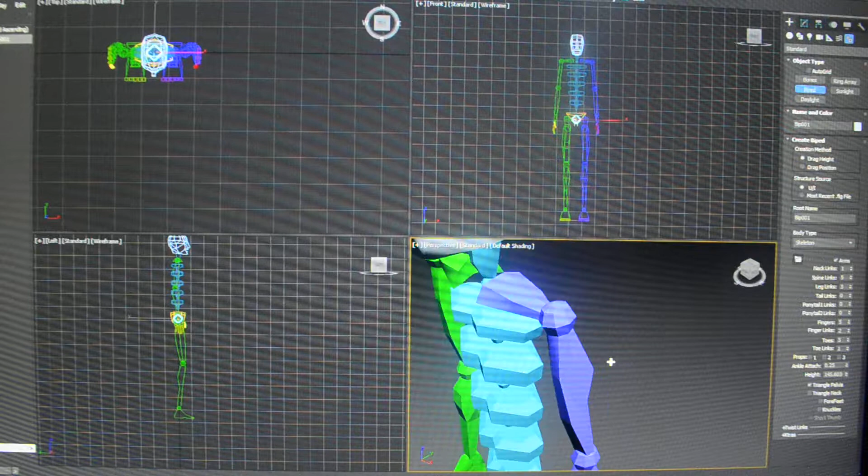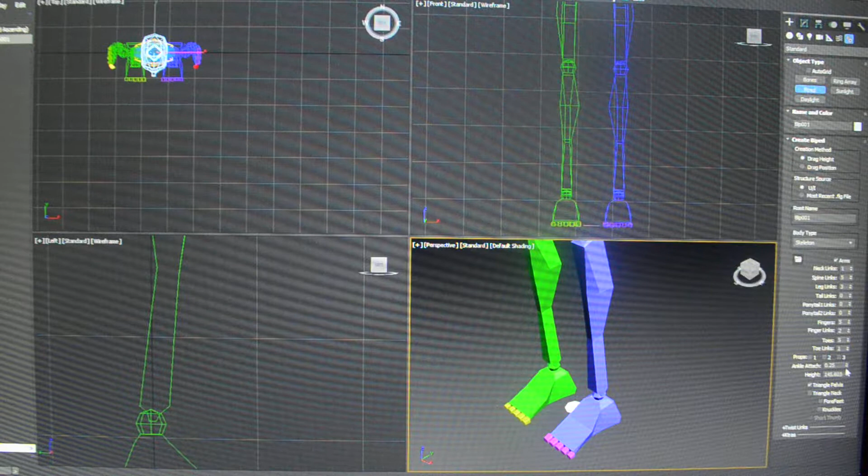After I've created my biped, you want to look at it to make sure it's what you want, because you can now, after you've created it, put the biped in here and make adjustments. So I made adjustments to my ankle attach. See, the ankles weren't right. They were like this at 0. So they need to be, let me double check this in side view.

Maybe 0.23 to be correct. Okay, so just check your biped, because now, you usually don't use 5 toes. Most people just use 1. I'm going to use none for this. Oh, you can't, you have to have 1. And it's because often when we do feet, we just do 1 toe, because they wear shoes, or they're a character that doesn't have a whole lot of movement there with individual toes.

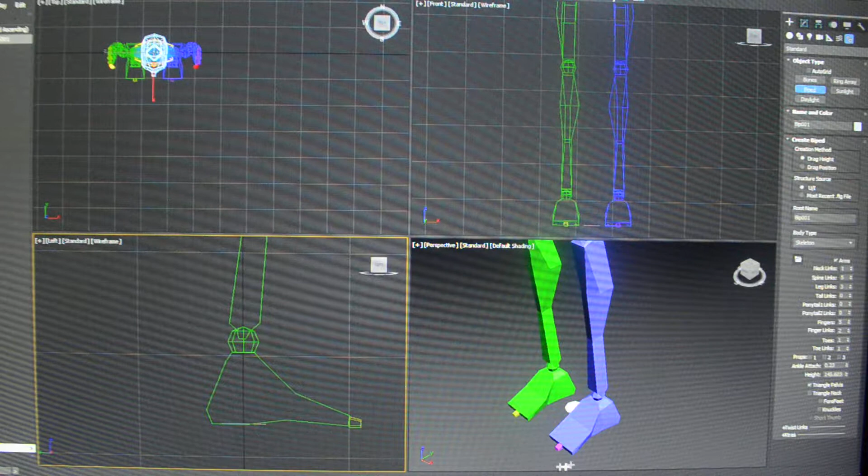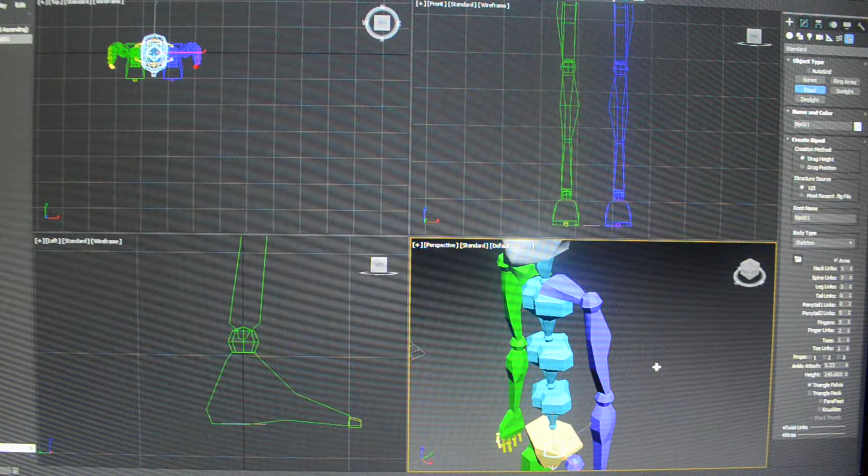Okay, and so you can make those changes now while you have the biped in here. I don't really need that many spine links. He's not going to bend that much. It's going to bend at the waist, bend maybe in the middle and at the shoulder. So spine links 2 could be enough. Let's do 3 just to give him a little more flexibility. Okay, and so that's where I make changes to my character's parts.

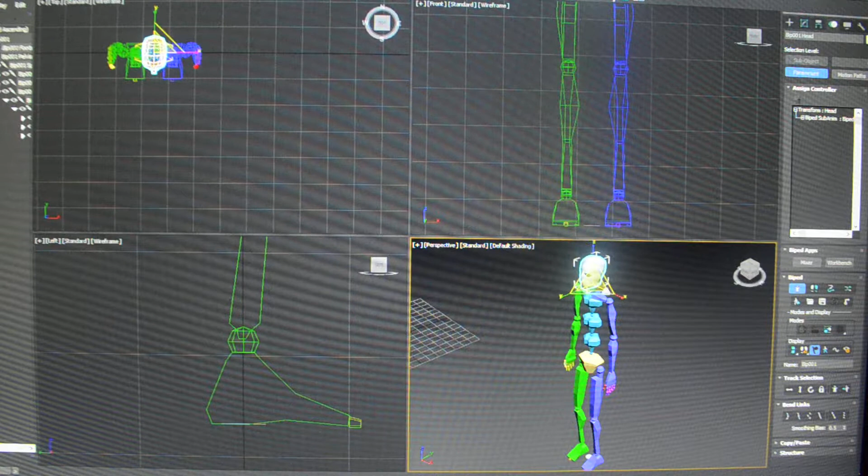If I want to make changes, for instance, I want the head to be larger, right? I'm going to go to my motion tab, parameters, figure mode, and then I can make the head smaller, larger. And any other parts that I want to make adjustments to, I can do that here.

Now, for your skeleton to match your characters, and this is where we get into more about why we use the Vitruvian Man pose, you just go to his upper arm and rotate those out, and now you see he's in that same pose, and he would fit inside my character if I had a character of a human. Most of the time we're not doing literal humans.

This will suffice for humans and humanoid figures. The great thing about starting with the biped is it's fully articulated. However, often you are going to do characters where this won't work. One of the things that needs to happen, once we get into skinning, for the skinned character to animate properly without problems, is that you want your bones to fit inside your character as well as our bones fit inside our bodies. If you again use yourself as an example.

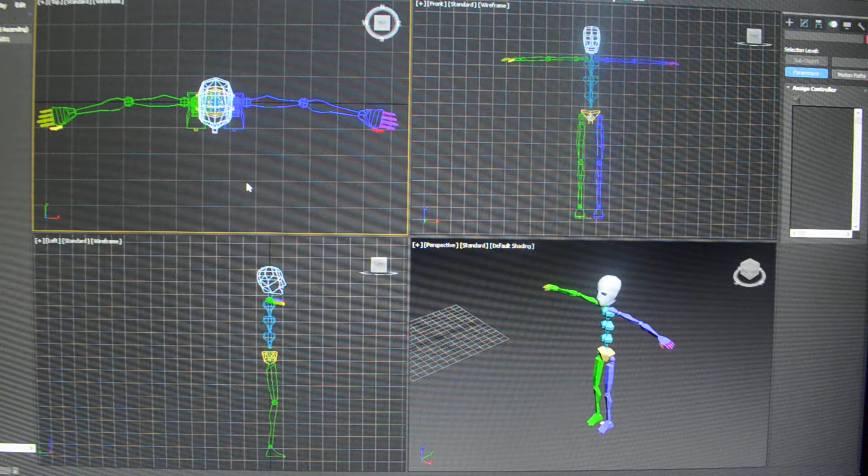And just the way you do that is by bringing in your character and using it as a background for the bones. And we're going to talk about bones too. So those are also under systems, bones. And here they are much more independent. I'm just going to do the default bones, draw default bones. So I'm just going to take the default bone and draw a bone in this view. And they keep going until you right click. And you see now I've just created a chain of bones.

And they are automatically linked. So if I move my hand, it swings the upper arm with it. If I move this arm, it takes the whole arm with it. It's just like we did with our bones. I can move the elbow this way, I can rotate this way. So this is a linked bone chain, and I can move my hand.

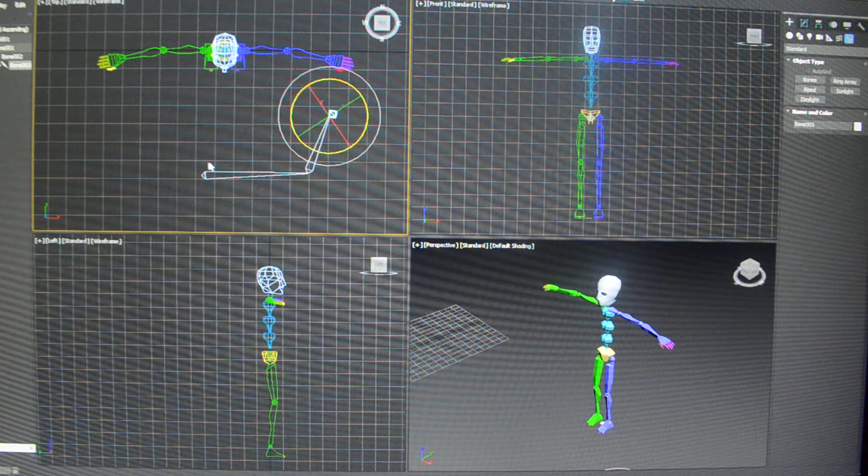And so you could see if I had a skin that fit over this, and I start to move these parts and pieces, and I apply the skin modifier, it will take the character with it. So when you see in animations, when you see characters move, what's actually being moved and manipulated is the rig. And that is why this is called rigging.

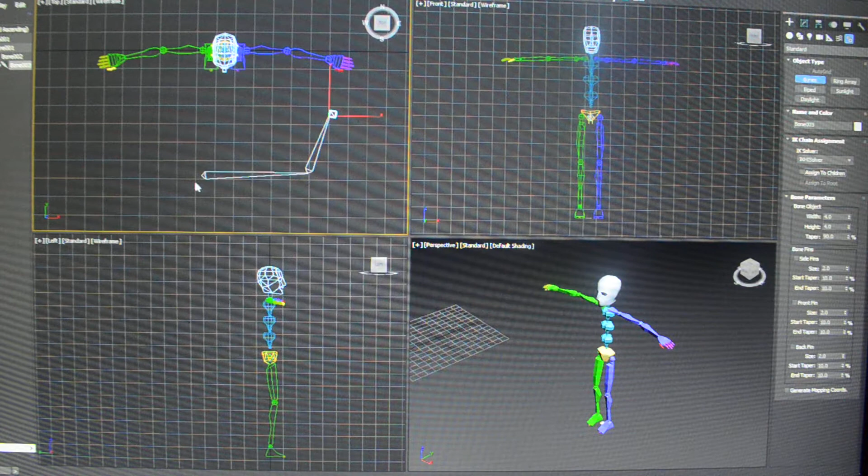Now, it starts to get more complicated to create your entire bone structure, but if I needed bigger bones, under the bone you can control the width, the height, and the taper, and the taper is how it tapers from one end to the other. I can also control fins, and fins help fill out the bone. It fills in, it's sort of like it acts like the muscles on the bone.

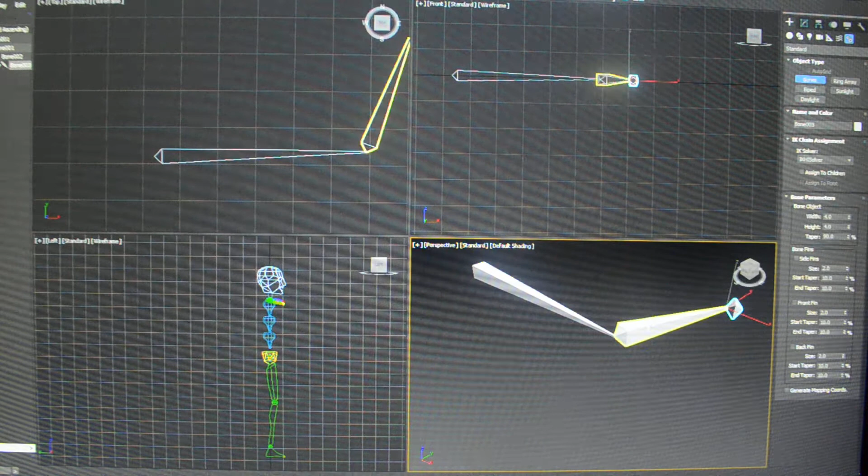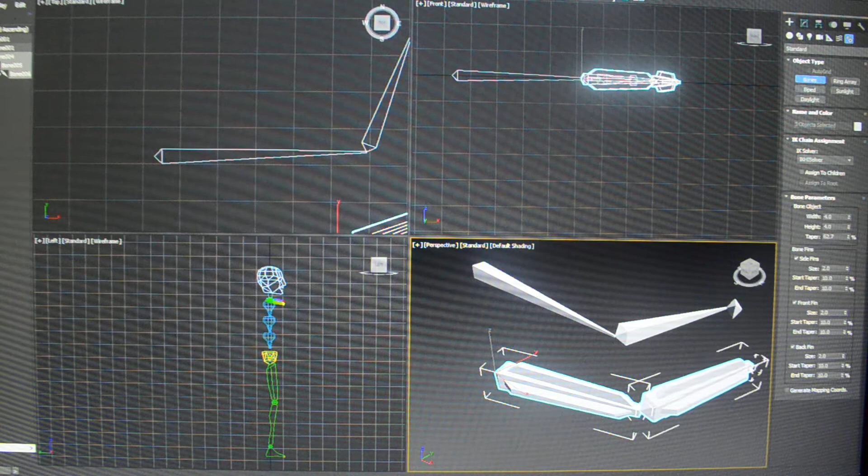So let me find this arm. I'm just going to show you by creating another one next to it that I've changed, okay? So 4 by 4 is the size, so this is 4 this way and 4 this way. I'm going to change my taper to somewhere around 60. Okay, and then I'm going to add fins. And now I'm going to create another bone. And you see there's more substance to this bone than there is to the original bone that I created.

And this helps with some of the things that I was talking about earlier about making sure that if you create your own rig out of bones, you create your own skeleton for your characters and you don't use the biped, it helps fill in the area to help create fewer problems. So it's really important to know this up front as you're starting to work on rigging your characters that we created in 2405, and start thinking about how you're going to do that.

Keep in mind that you have the ability to control your bones in that level of detail. And to me, this looks much more like—say this was my arm—this is much more like the bone in my arm, about that long, the upper arm is about that long, and it tapers about that much, and it's round-ish, and so the fins help fill that in.

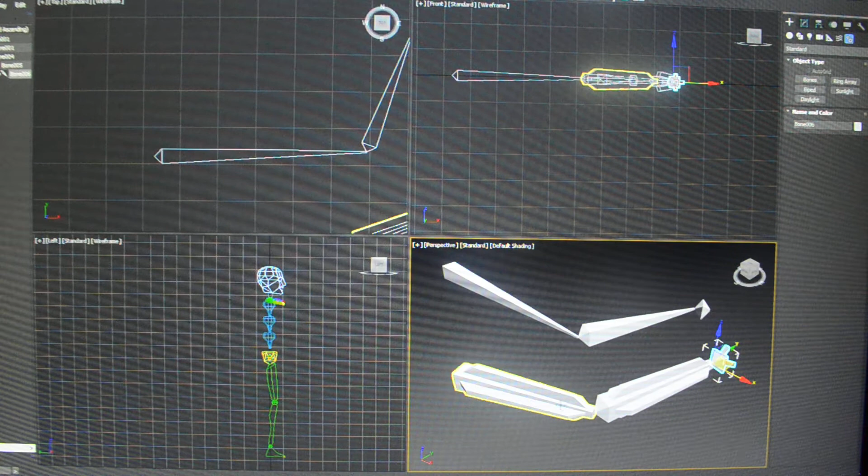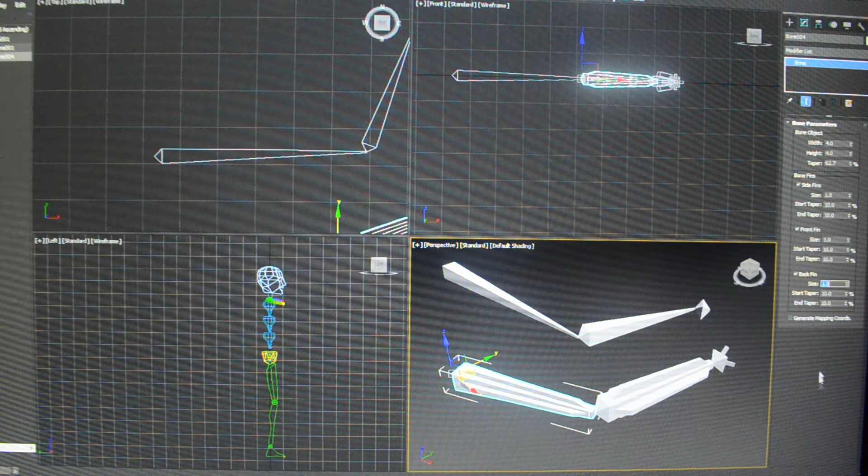And you can modify those through the modify tab. So say I decide I want smaller fins, I can reduce the size of my fins. I may have made them too big. Let's just type in 1, and that way maybe my arm is not quite so beefy there. So I've just reduced the fins on that.

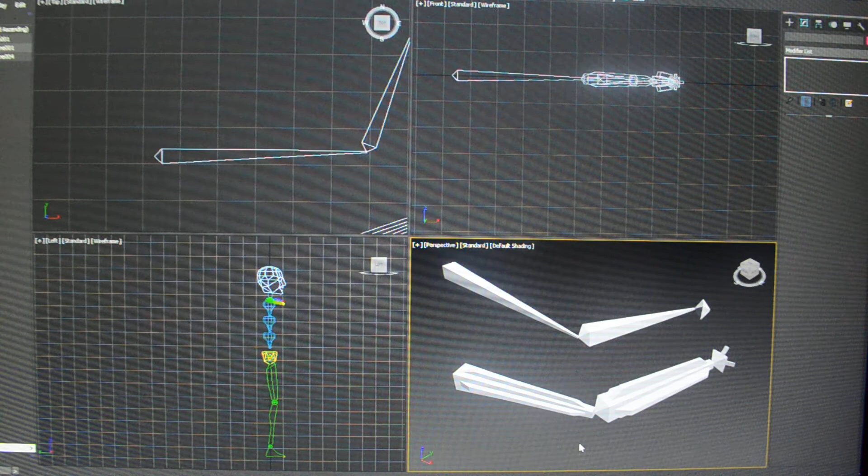Okay, so we're going to talk a lot more about bones. I want to go back to talking about bipeds in the next video. We're going to talk about how to make them walk, and we're going to work with the bipeds first, and then we'll get more into bones after that. So let me know if you have any questions.